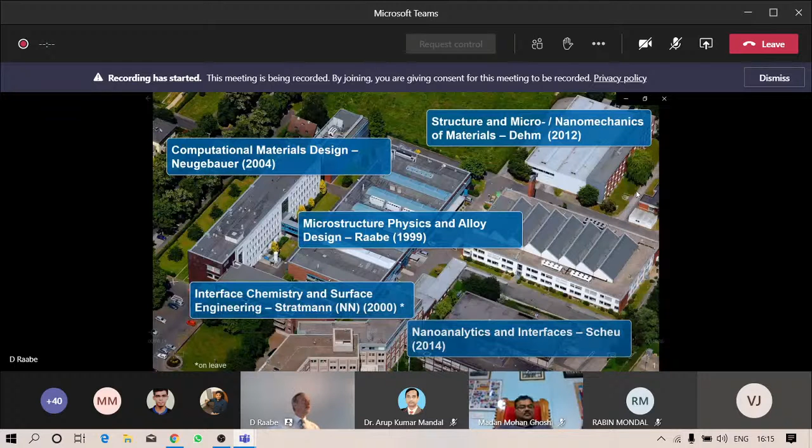The Max Planck Institut in Düsseldorf currently has four departments. There's one on computational materials design from my colleague Professor Neugebauer, mainly on density functional theory, and one on micro-nano mechanics from Professor Dehm. My own department is on microstructure physics and alloy design, which I'll show more of later. Then we have a department on surface science and chemistry from Professor Stratmann, and an independent group on nanoanalytics from Professor Scheu. So we are about 350 persons on board and have a budget of roughly 23 to 24 million per year, depending on third-party income.

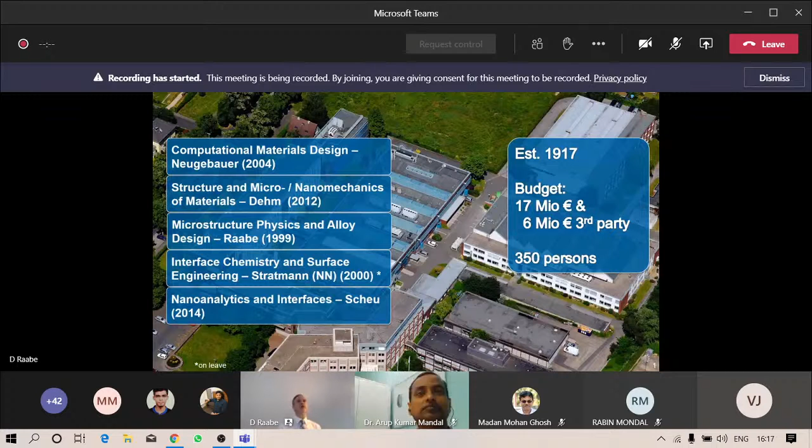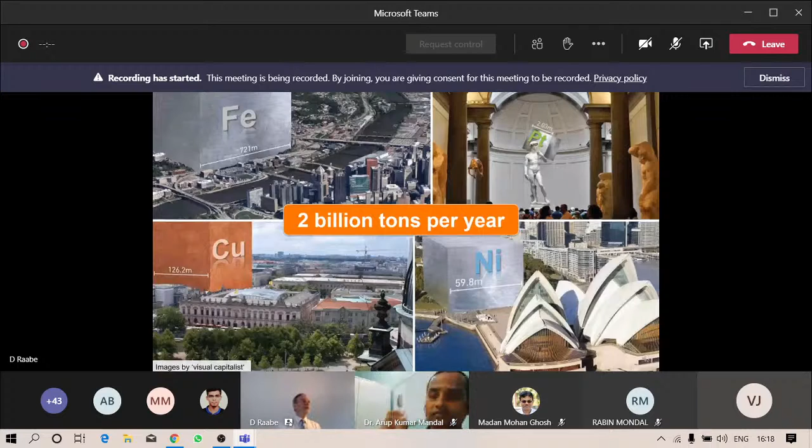So we all know why this topic is of interest at all. We know that we produce about 2 billion tons of metallurgical products every year, and this goes along with a huge global energy demand, 8% pertaining to metallurgical products. We are also causing, by that, about 30% of all industrial greenhouse gas emissions.

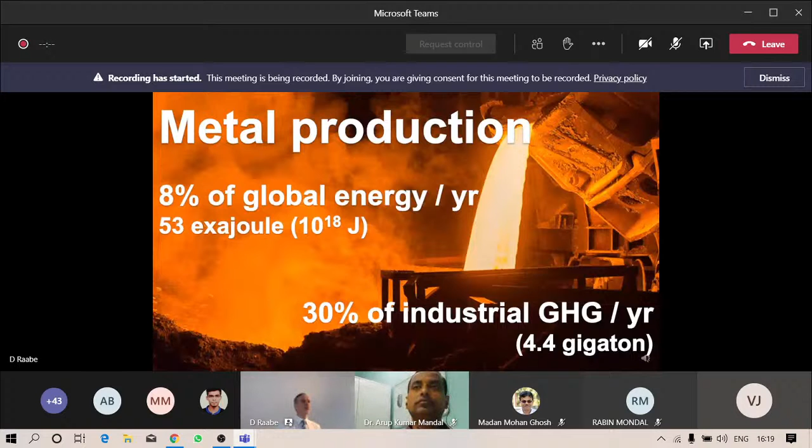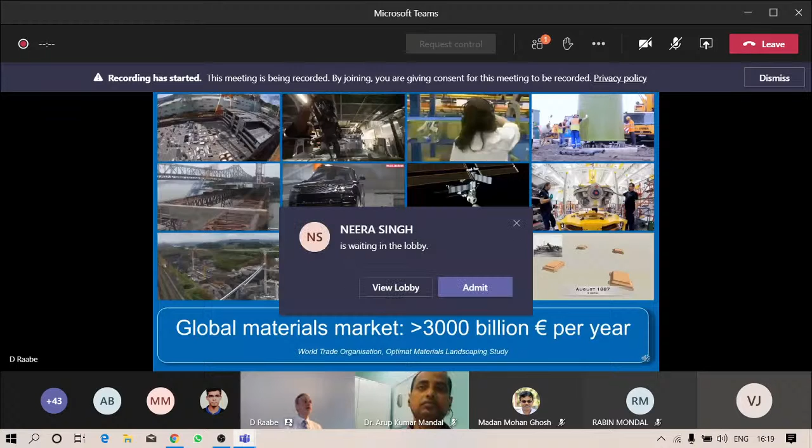On the positive side, we of course have a gigantic market related to materials, specifically to metallic materials. We talk here about a quantity of 3,000 billion euros turnover every year, where the majority relates to metallic products.

We know that the properties of our alloys are typically requested at a macroscopic scale, be it mechanical properties and corrosion. But we need to understand the defects, of course, at the atomic scales.

That interplay of defects, properties under certain boundary conditions and processing is what we are interested in today, particularly related to the question of how we can cast this into a digital twin. So the question is how we can put this understanding into mean field constitutive formulations that we can subject to a boundary condition and initial value treatment so as to make it accessible to advanced simulation methods.

Today I will show you particularly how we use such crystal mechanical and constitutive simulations in the field of advanced processing simulation, of advanced forming, and microtexture evolution predictions.

It's a triviality that mass and energy are conserved quantities, but microstructure and properties are not conserved, and they are also not in equilibrium. They are maybe in local mechanical equilibrium, of course, but there's no steady state equilibrium throughout the material. All these features have to be properly considered in any mean field constitutive formulation that we use under the framework of the DAMASK package.

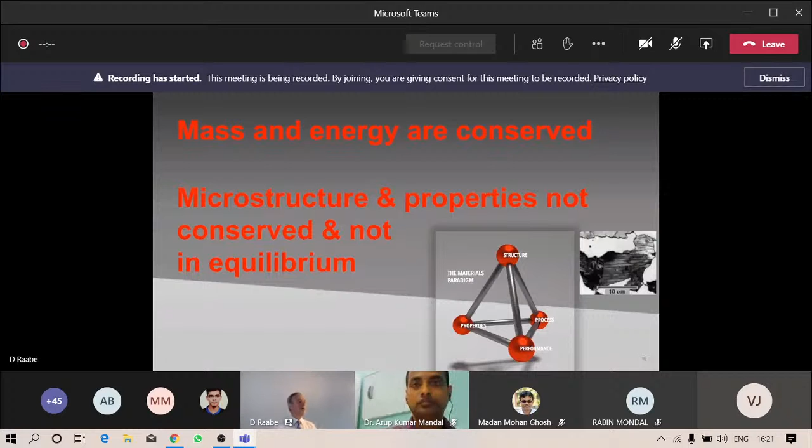That means the simulations must be microstructure sensitive. We all know that the properties of the materials, particularly the mechanical properties, are designed through the microstructure, and the microstructure is amended through the processing of the material. Hence, again, the main message that I want to share with you today is how we realize it to make such formulations mechanism and microstructure sensitive.

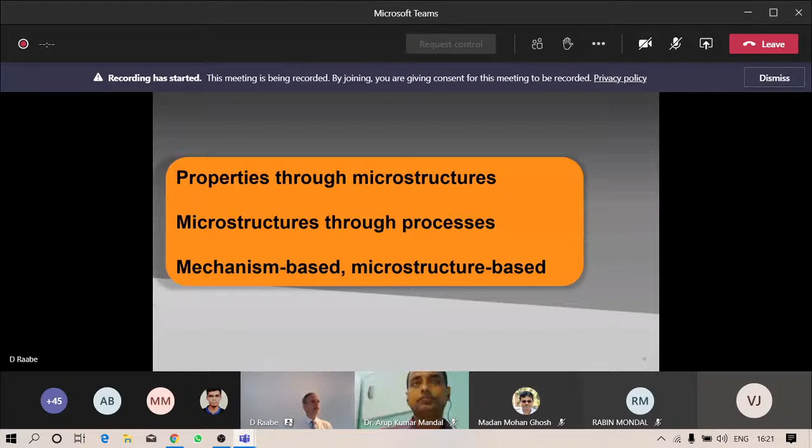That is a take-home message from any such simulation, that we have to alter and adjust and understand and simulate microstructures to serve that specific need, exploiting the variability of properties in terms of the underlying microstructure.

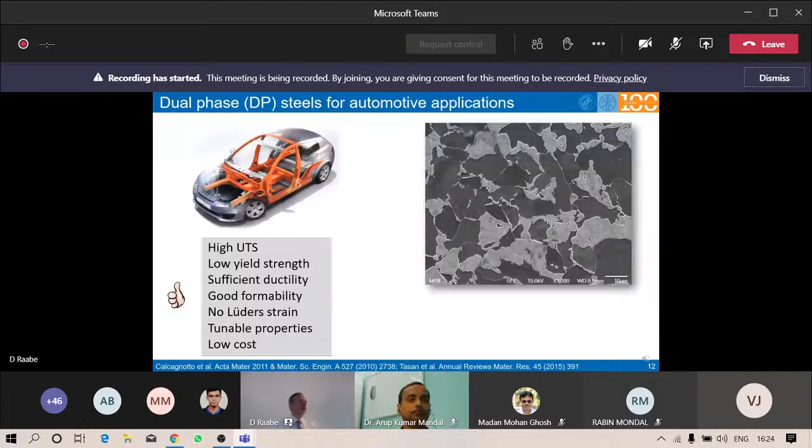They have a high ultimate tensile strength, UTS, low yield strength, which is good for forming operations, but they have sufficient ductility, good formability, no Lüders strain, that is very important for engineering parts, and they have highly tunable properties and, of course, very, very low costs.

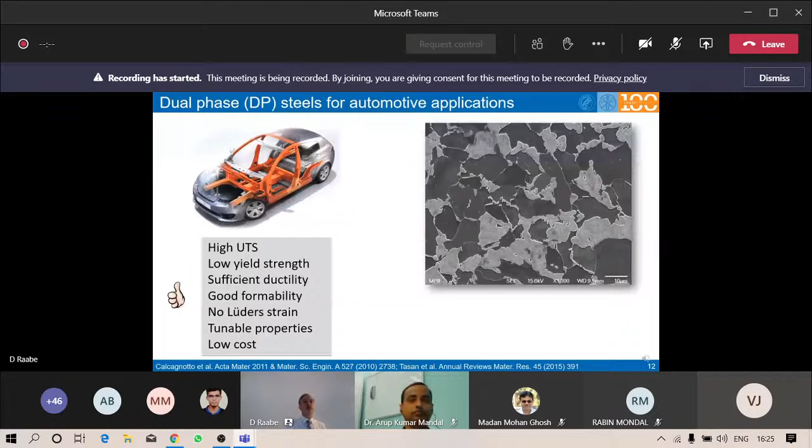Now, the tuning comes, for instance, through measures like grain size reduction or martensite volume fraction increase or carbon content increase. And we all know that would come also at the cost of ductility.

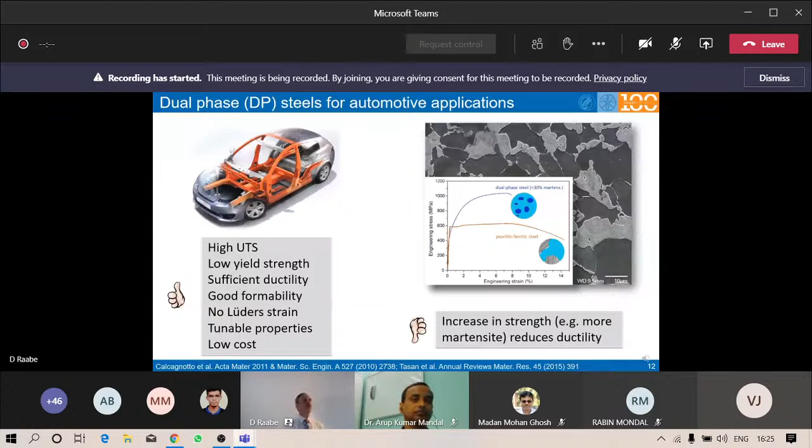Now we subject such microstructure ingredients as martensite to in situ tensile tests. That was a nice activity built up by Cem Tasan at our institute over the past years. You can study, for instance, the elastoplastic mismatch between adjacent fine and coarse laths.

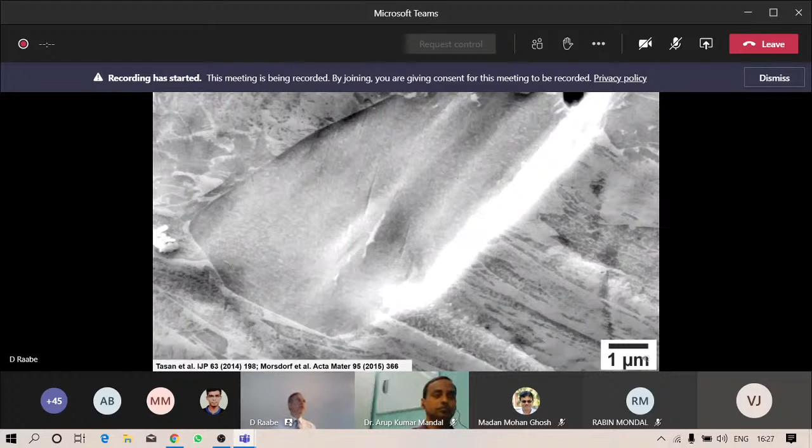We would typically assume that for a crash-relevant forming part, the TWIP steel should behave quite well, because you have a huge integral over stress and strain, meaning a part made from such a steel should have very high energy absorption capability.

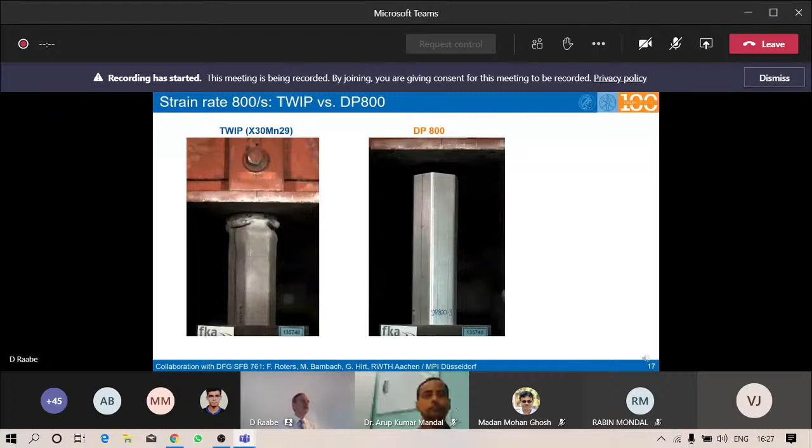Now here is a typical crash experiment conducted on both materials with such a typical crash box. Interestingly, we learn that the DP steel, with the lower integral, so lower total mechanical work, actually performs much better than the TWIP steel with a much higher integral. That's a surprising result at first glance.

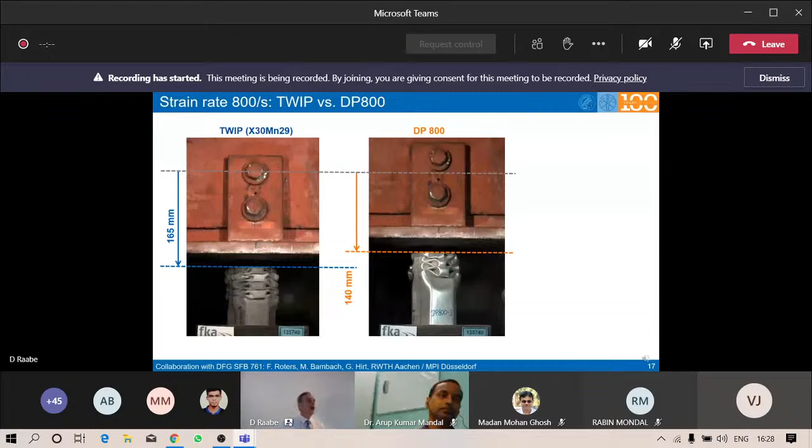But when you look a little closer at some of the strain points, particularly from the highly strained parts and buckling area of these crash boxes, and translate them back into these simple stress-strain curves, you see that the maximum strain doesn't exceed about 18 to 20%. That means only this part of the total integral is really needed for designing such a part.

So the very high energy absorption capability of the TWIP steel, as a counter-example, is actually not really needed for this specific design of such an automotive crash box as shown here.

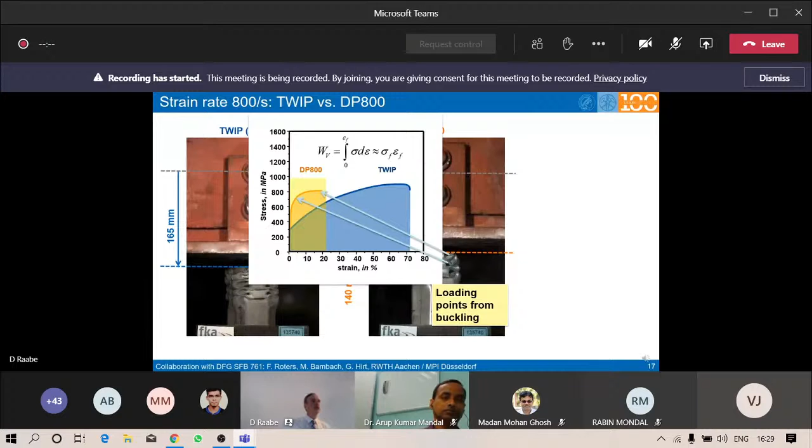That's quite trivial for a mechanical engineer, but the message is that energy absorption depends not only on the specific alloy you use, but also on the nature of the part and the loading scenario. That means any digital twin or simulation method bringing together microstructure and mechanics must be tensorial in its response and account for the tensorial nature of the loading scenario, hence must include the texture and orientation-dependent parts of the microstructure.

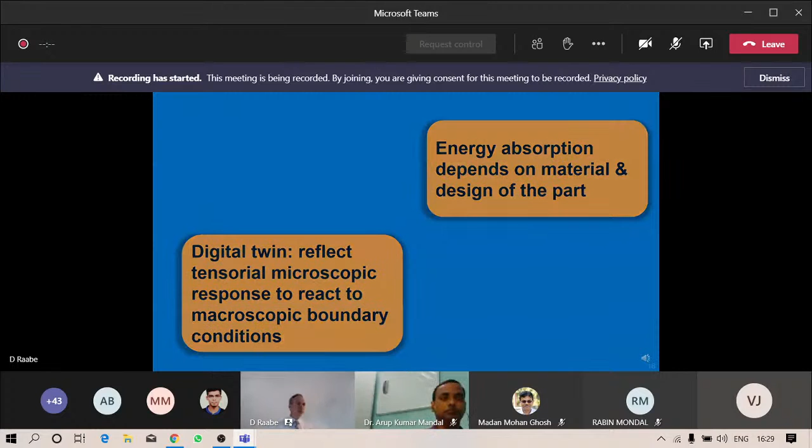That is at the very core of this simulation package DAMASK, which you see highlighted here as a little teaser. We developed that, as I said, over nearly 25 years, and have many customers and colleagues around the world in industry and academia who use it. We are just before a new release.

Very soon a release of DAMASK 3 will go public. It includes a couple of features and capabilities that you can do with this simulation package, which I'll share with you during the course of this presentation.

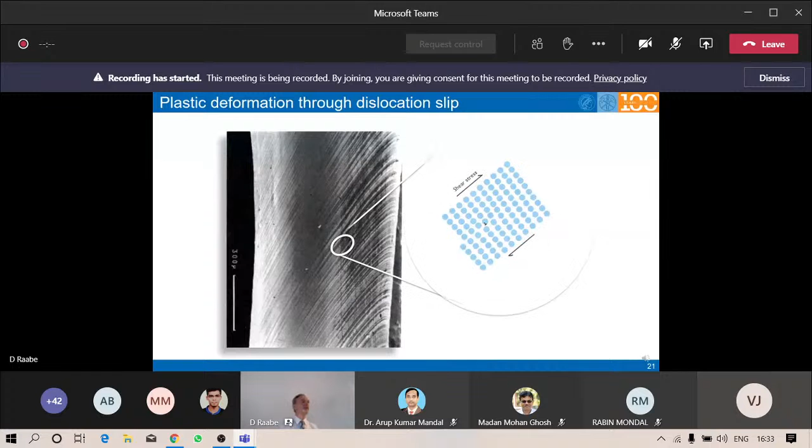Let me jump back to a very trivial picture that we all know from textbooks, just as a reminder of the underlying mechanisms that we try to describe in crystal plasticity models. Here you see such a nice picture from a textbook with surface steps coming from the glide of dislocations. Of course, the surface steps are much bigger than one Burgers vector because we have a number of dislocations coming from the same source.

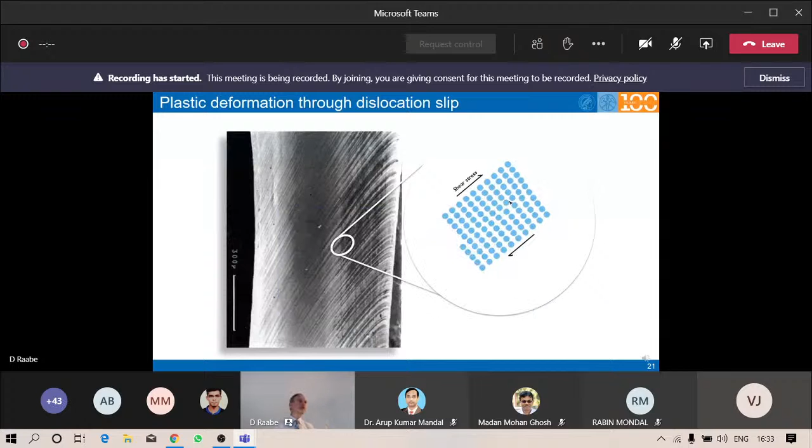And then you can use, as plotted here, the well-known Orowan equation, which allows you to calculate the shear rate gamma dot from the activity of these mobile dislocations, their Burgers vector, and their velocity field. So you have a very simple mean field access from Orowan theory, from Kocks-Mecking type of theories, to translate populations of many dislocations into the corresponding kinematic measures that you need.

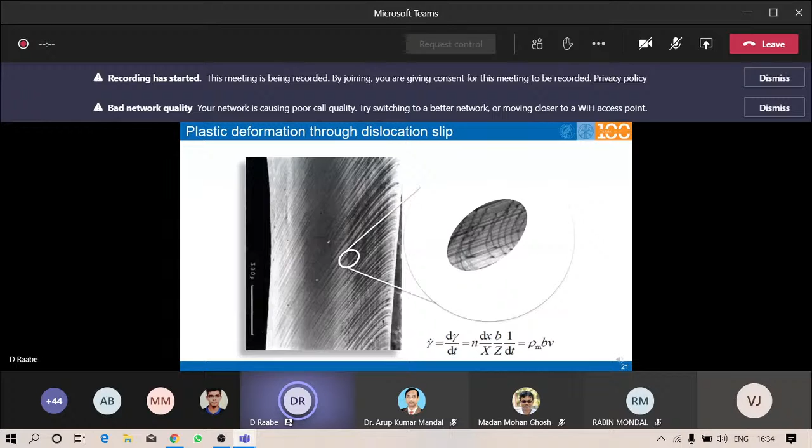When you want to describe the strain hardening, you have, like in a Kocks-Mecking model, to account for the dislocation interaction, or you can consider the mean free path reduction, like shown in this little animation. When a grain boundary is in your way, you can describe the reduction of the mean free dislocation path in a harmonic way, where you add up all the obstacles that are in the path of a moving dislocation set.

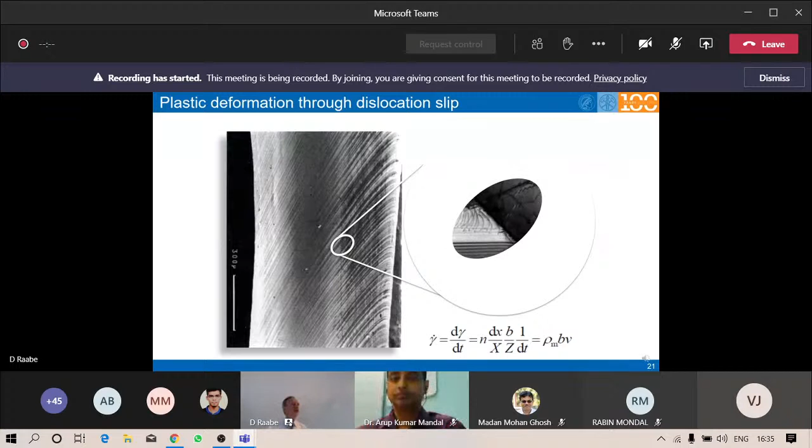And that would contribute to the strain hardening in a Taylor formulation. What is really important for more complex steels are TRIP and TWIP effects. TRIP stands for transformation-induced plasticity, while TWIP describes twinning-induced plasticity. You see here an in situ microscopy movie where you see how at the tip of the martensite you create rich populations of dislocations that are emitted because that martensite, formed under mechanical loads, is not commensurate, it's not compatible, and has a different volume than the adjacent austenite. That creates a lot of misfit plasticity that hardens the material.

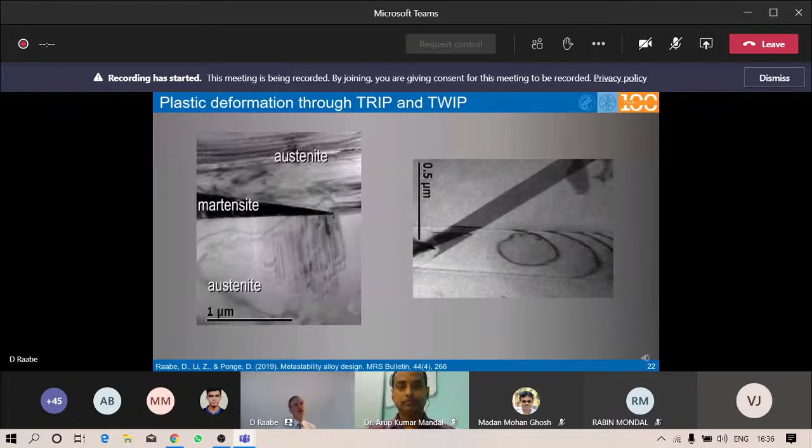Likewise, on the right-hand side, you can see a typical in situ TEM image from a movie of a TWIP steel, where the formation of twins produces a confinement of the plastic slip of the dislocations. And the hyperbolic function tells you that the stress for that half Frank-Read source operating here scales with the spacing of these twin walls.

So these were just some examples where we try to translate elementary physical metallurgy mechanisms into corresponding mean field formulations, mainly through the reduction of the mean free path or the stress needed to activate Frank-Read sources.

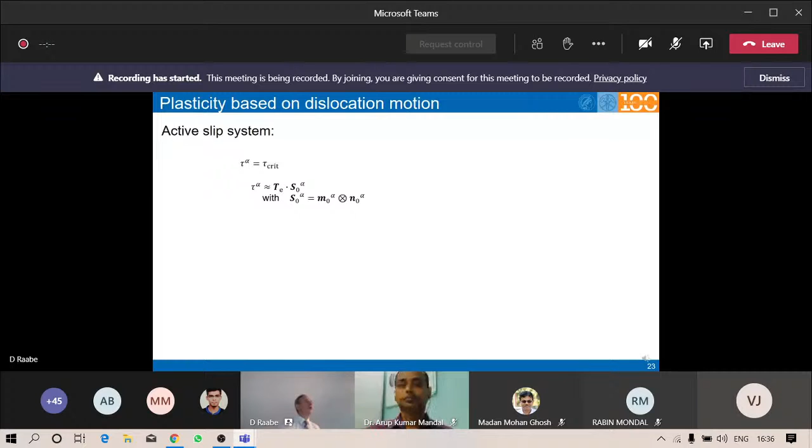Now a bit of the kinematics, because all of this has to be written in dyadic form, in tensorial form, not in scalar form. Here you see again a very simple textbook equation from my classes on micromechanics when we pick a body-centered cubic crystal structure and assume that you have 48 slip systems. You can, for each of those, calculate what you know typically as a Schmid factor, which is, of course, a Schmid matrix or Schmid tensor.

When you add to this the 1 1 2 or 1 2 3 systems, where 1 1 1 is of course the Burgers vector divided by 2 and the first indices are the glide planes, then you get a more complex shape of your local dyadic response. And all of these glide systems come with an individual strain hardening behavior described by these constitutive laws I described before.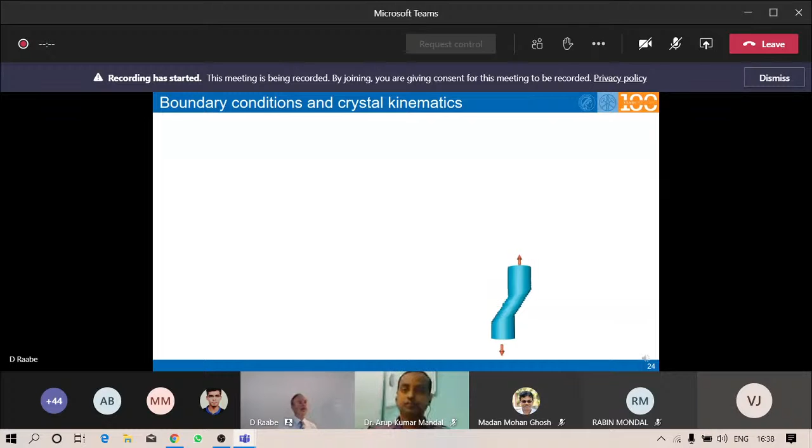But we learned from this very simple picture a couple of things. You see that the crystal is typically deformed under certain constraints. This sounds trivial, but it cannot move freely as shown in this animation - it is tied to these holding grips in the tensile machine, or constrained by the environmental crystals. That means you have only these geometrical constraints, these boundary conditions that enforce certain crystal rotations.

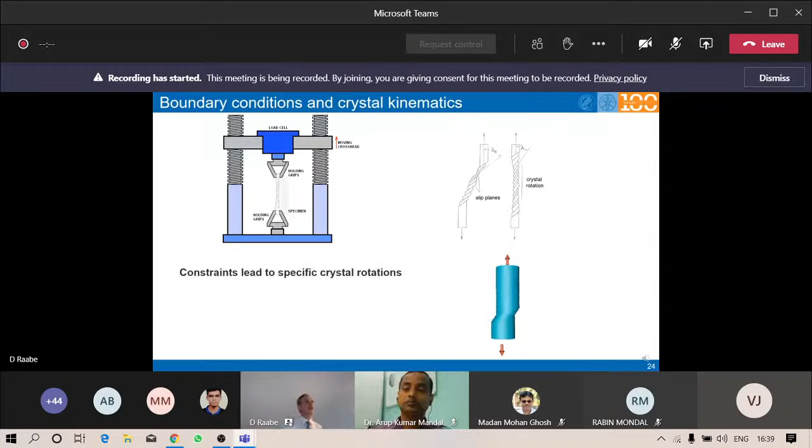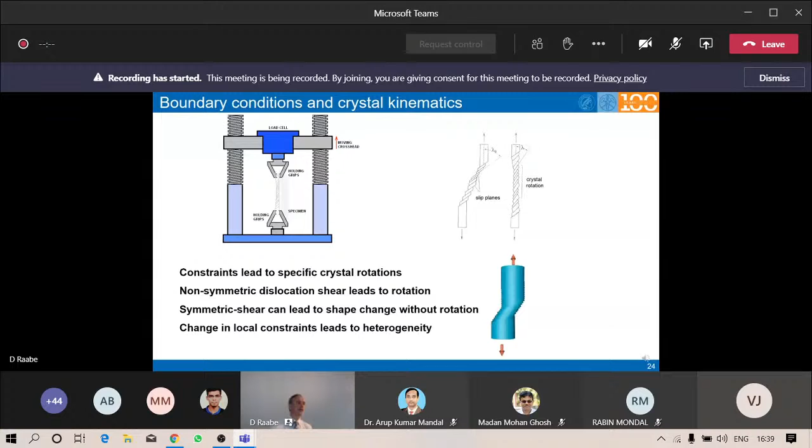And the fact that these boundary conditions are not homogeneously distributed across the expansion of such a crystal means you can also have gradients of crystal rotations from one surface to the other, which easily explains why often the texture in micromechanical evolution is very heterogeneous even inside grains. I found this view graph helpful because even such a simple kinematic point can be made readily clear with such an example.

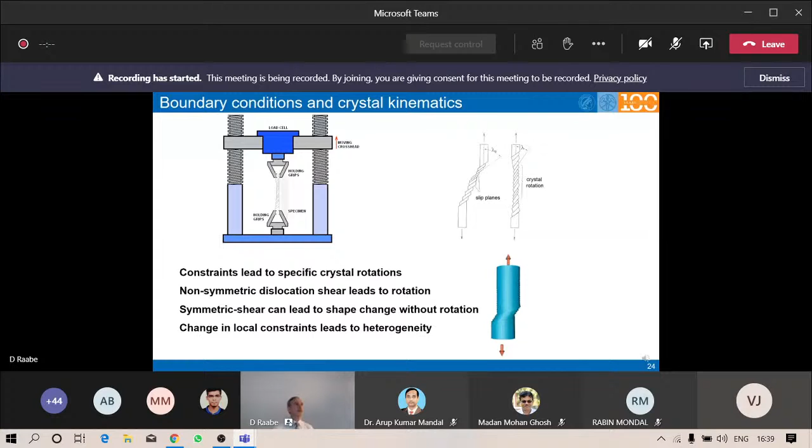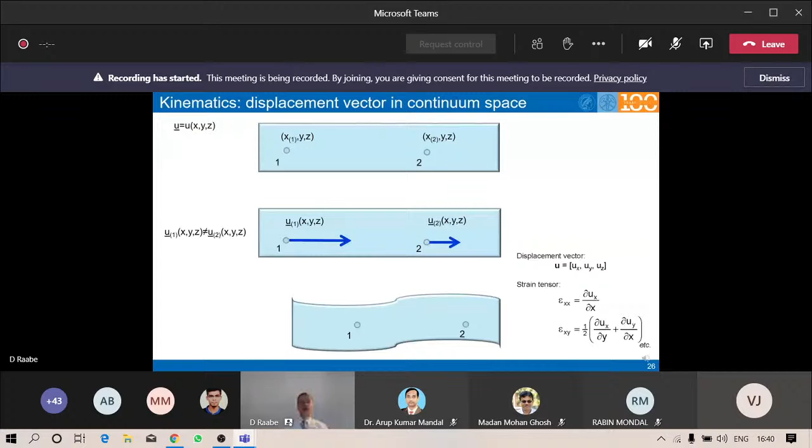When you repeat that thought experiment but impose two displacement vectors, shown in blue, which are not identical, either in magnitude or direction, then you impose a distortion - that means these are not compatible. That sounds trivial, but that's how you formulate the displacement gradient. That means only the lateral gradient of the displacement field is what gives rise to being accommodated by dislocations or twin or TRIP effects. So strain is just one possible linear, additive, or polar measure for the distortion that we typically use.

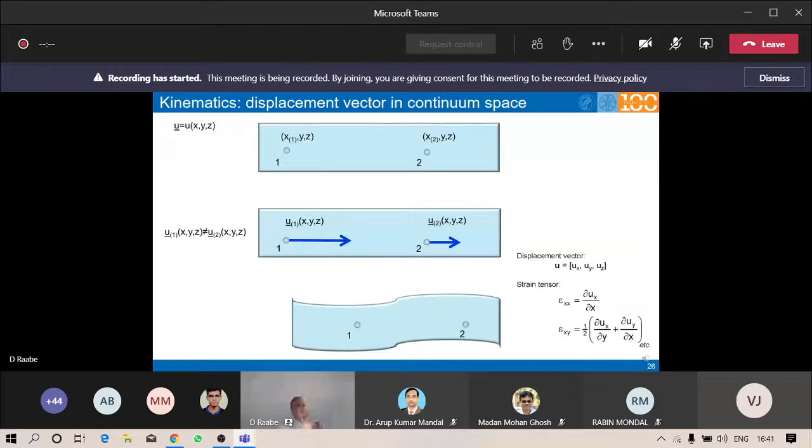The physics quantity that you need to match is the so-called displacement gradient tensor, and that is what you describe in terms of the individual dislocation fluxes in each of these directions. Because that mismatch described here in classical continuum mechanics has crystals accommodate it by shear carriers like dislocations or twins.

In DAMASK, we represent all these anisotropy features at the integration point - the elastic response, the phase composition, the shear rates, the flow equation I already told you about, the Schmid factors in a polar kinematic framework, the crystal orientations, and also possibilities to do local homogenization at a spot.

When you describe a bigger engineering part, your point cannot describe a single crystal, but must already describe an agglomerate, a mean field set of crystal orientations or phases that you homogenize and feed that information back to your integration point. And since recently, we also work on details of damage evolution, mainly with Pratheek Shanthraj, who is now at Manchester University, and with Bob Svendsen, who is at RWTH in Aachen.

Maybe the biggest challenge that we currently encounter in such simulations is how to predict the gradual evolution of microstructure-related damage in such materials with their high degree of inhomogeneity.

So that gives you a rough impression of how the setting in DAMASK works, and which constitutive parameters have to be taken into account. That means you can retrieve the information you need to map, either from microtexture measurements or from X-ray texture measurements, and subsequently decompose it.

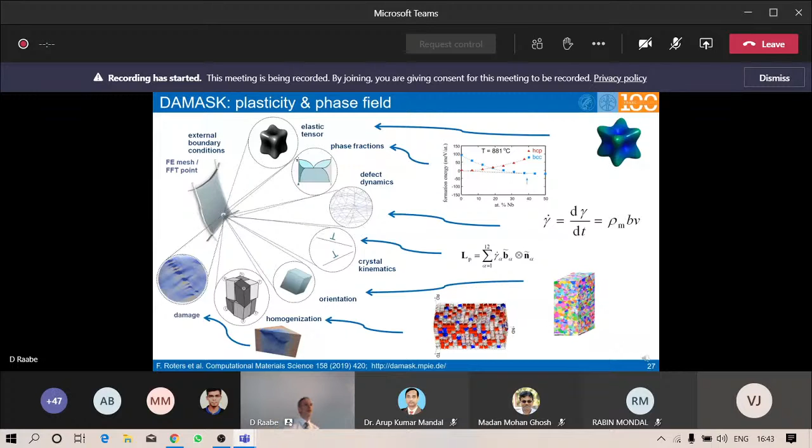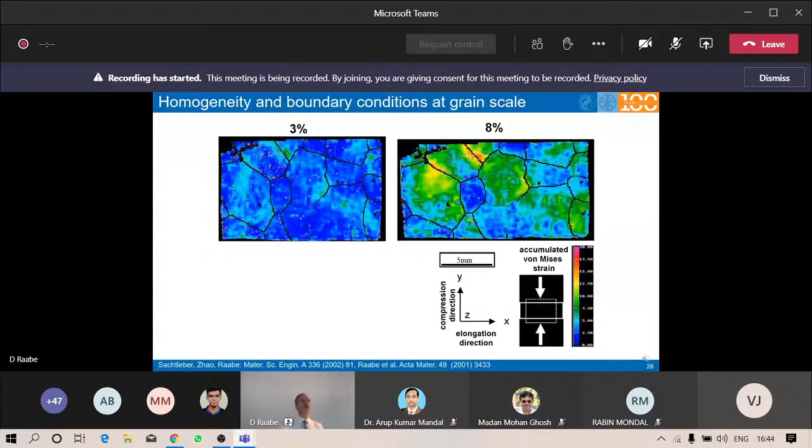Even with 15% total thickness reduction of that columnar polycrystal, some grains have undergone deformation beyond 20% locally, while this very hard rotated Gauss grain in the center deformed not more than 2 or 3%, even though the entire sample was loaded 15%. So that shows from a very trivial high purity aluminum sample how enormously inhomogeneous such deformation can be.

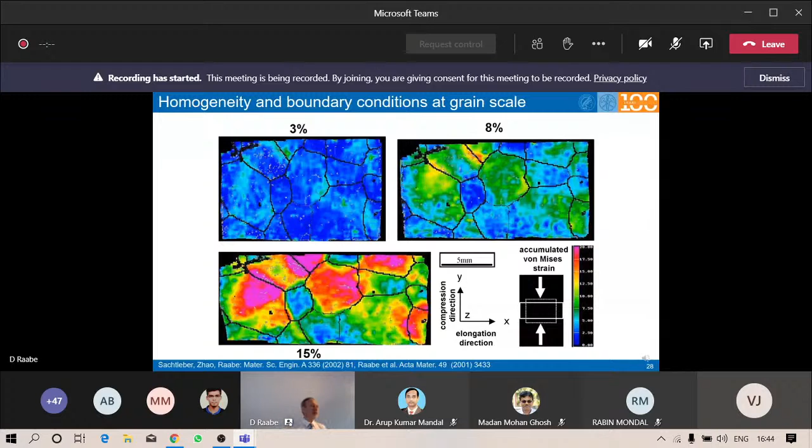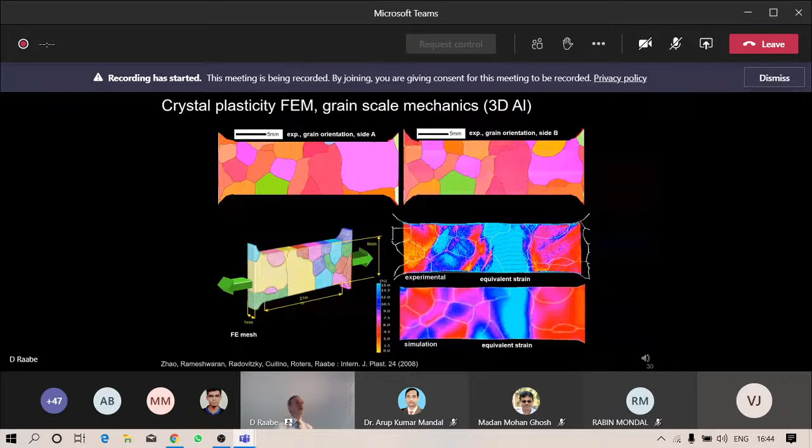That is just the 20-year-old simulation result we achieved by finite element calculations, by crystal plasticity finite elements. This is another example we did with Raul Radovitzky about 15 years ago, using a somewhat more complex setup in full 3D with a crystal plasticity calculation. We did very similar experiments again, and found very good agreement. That's how we step by step developed these techniques.

Now let me show you more in detail what we've been doing over the past 5 years on more complex steels, going back to the DP steels with ferrite and martensite. Here you see such a calculation based on the microstructure I showed before, and for a simple tensile loading situation, the enormous variation in the local stress that you predict. Here in blue, you see gigapascal range stresses at local mismatch features.

Interestingly, you even see compressive stresses, which happens when two very hard areas are moving together by the constraints, setting local regions even under compressive load. This is something you get out of a more complex microstructural landscape, such as encountered in many complex steels.

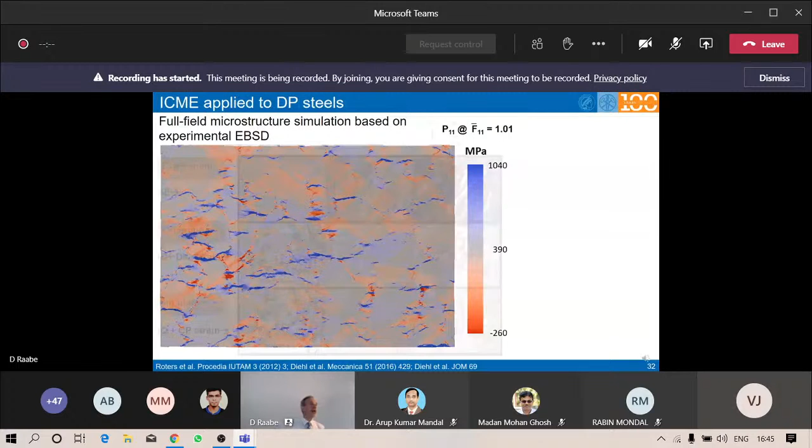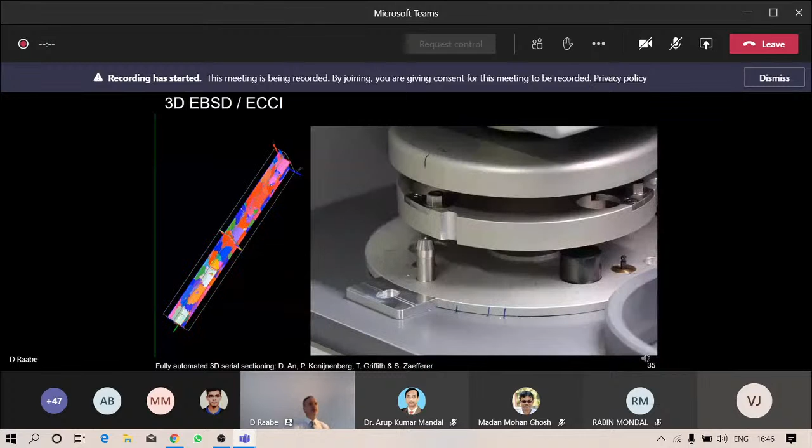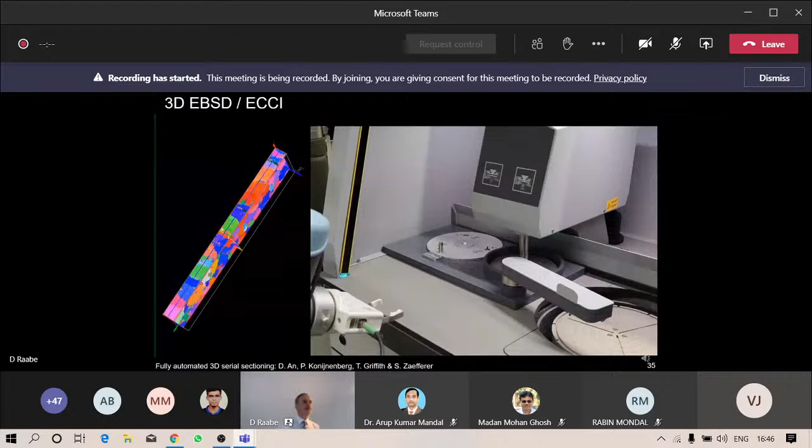So we invested a lot of time and effort over the past 10 years to develop a 3D serial sectioning technology. This was all built in-house with Zaefferer, and an automated serial sectioning technique combining a classical polishing machine that is run completely by a robot. There's no researcher involved anymore.

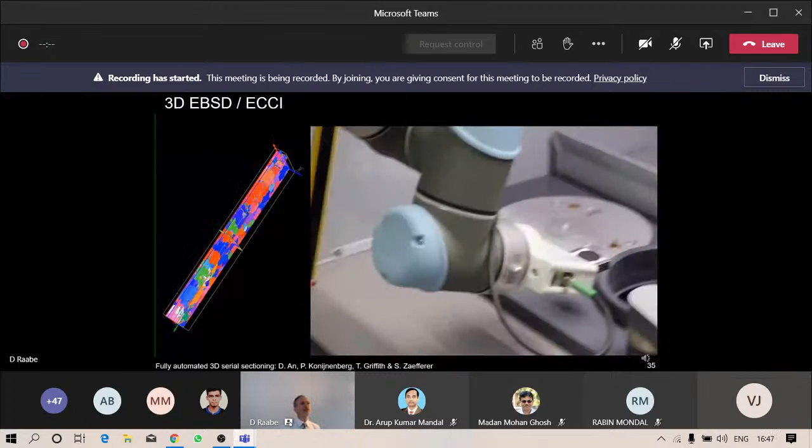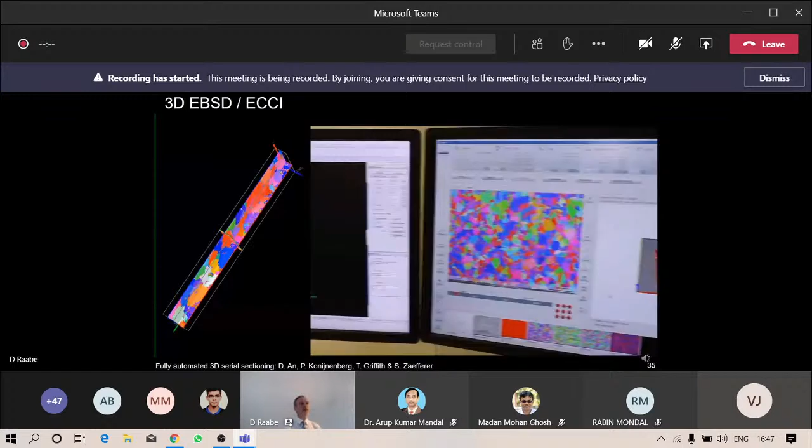The robot takes the polished sample out of the polishing machine and charges it into the microscope. We connected the robot to a Gemini-size microscope for high resolution field emission measurements of ECCI contrast, EBSD contrast, and so on. The robot alone operates this, starting the measurements to get the microstructure results you want, then stops the experiment, takes the sample out, and runs the next polishing round.

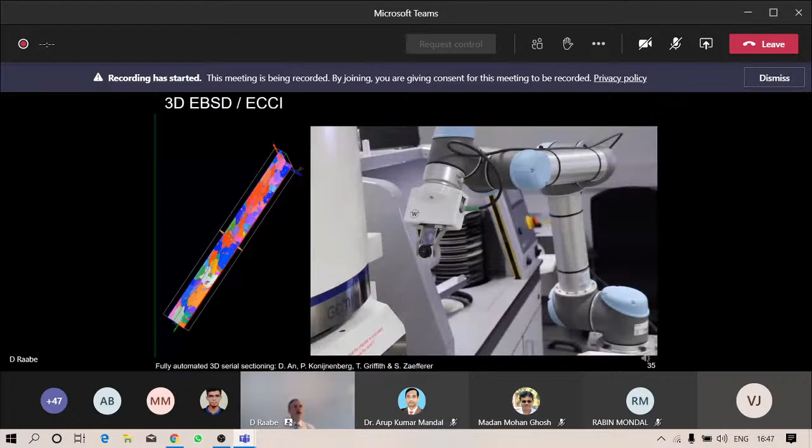You can define the thickness removed between subsequent serial sectioning polishing steps, and get all kinds of 3D microstructure information, such as a corrosion fraction as a function of corrosion time for different grain boundaries, like here from a stainless steel.

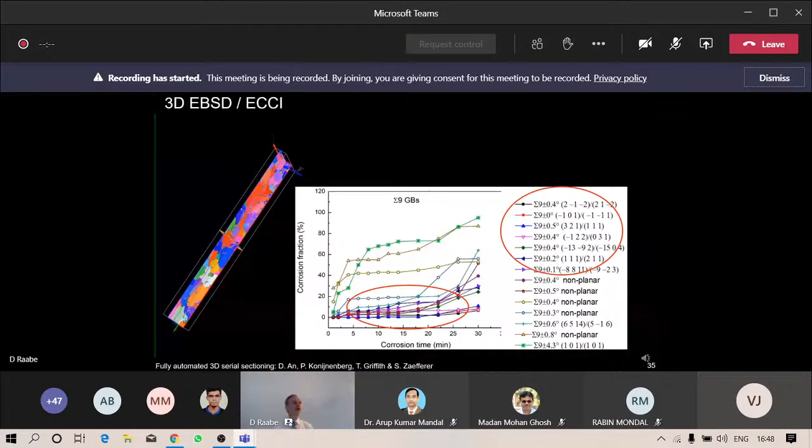Or you get results like shown here from a copper sample subjected to an ECAP process, from a project by Peter Konijnenberg, Shao-Pu Tsai and Stefan Zaefferer, where you get not only the three-dimensional microstructure but all the associated higher order kinematic information, such as the nature of the crystallography of the grain boundaries, showing here the population of the 60° <111> grain boundaries.

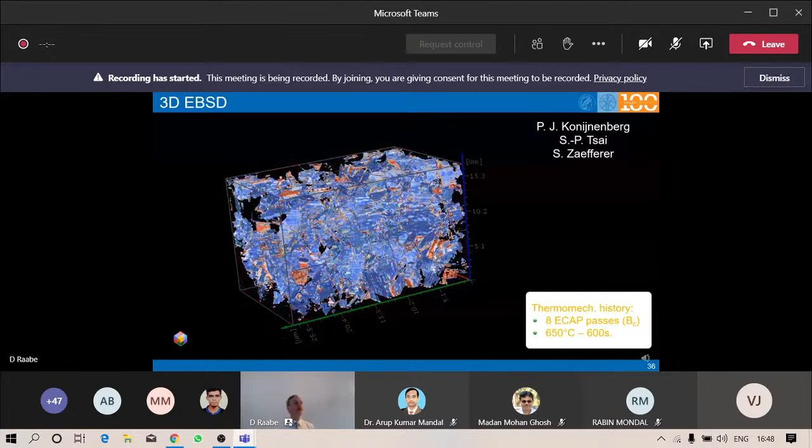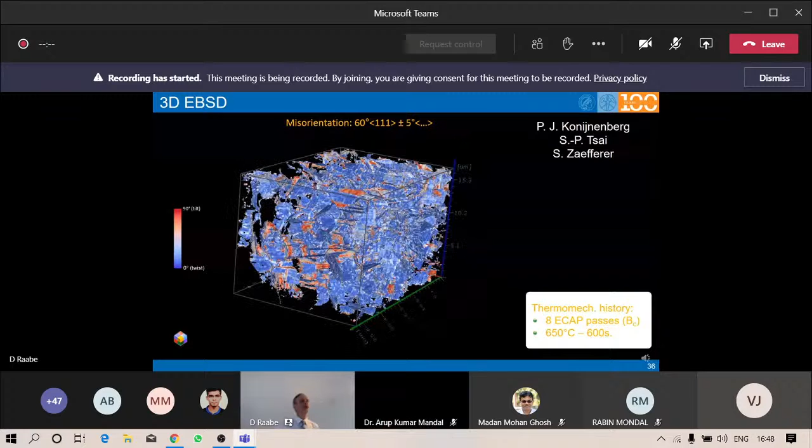You can differentiate between the tilt and twist boundaries, and you get data packages such as shown here, where you see both the grains and also the individual pattern qualities for discrimination among phases and the associated interfaces.

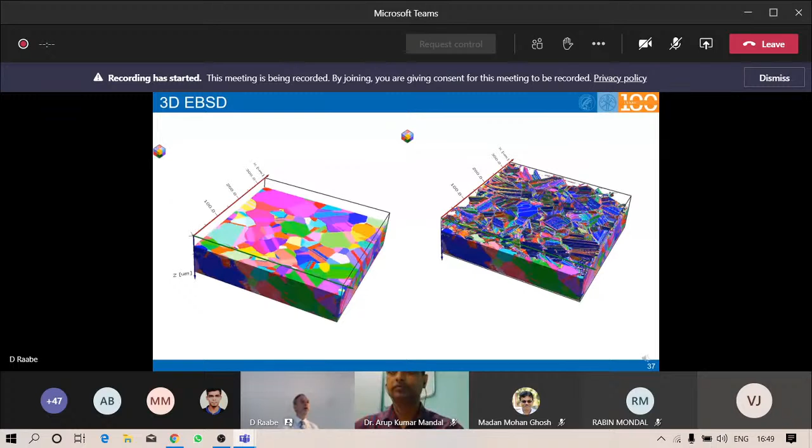Now we do the same thing also for steels. I've shown that movie already, where you get such 3D data, for instance now again for a dual phase steel. We ran such a box of 3D data through DAMASK, and you get a real high fidelity simulation of the strain and stress distribution also from such 3D microstructures.

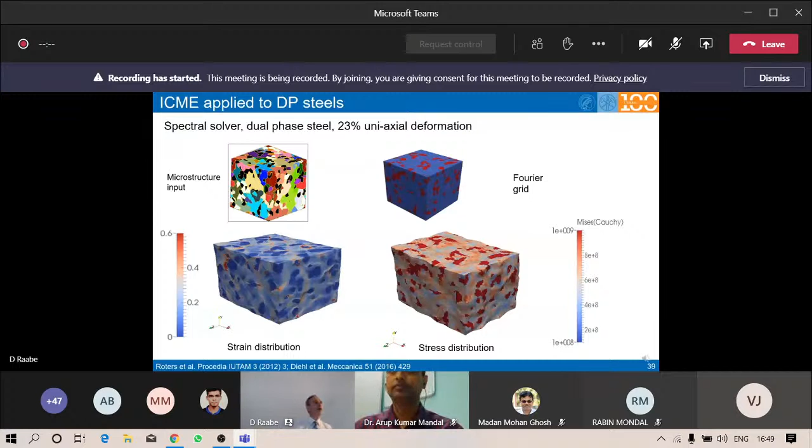Now we took a much bigger patch that was done in a big project by my colleague Martin Diehl, who is also now a professor at University Leuven, just started a couple of months ago in Belgium. You see we did the same thing. We render this microstructure digitally, but you must appreciate this is now a three-dimensional microstructure, consisting of many such slices, as I've shown you before, retrieved by this technique.

And you see here now the corresponding computer simulation where this is uniaxially loaded, and the equivalent strain and equivalent stress distribution that arises. When you compare that in detail step by step, like I've shown before, you get a much higher fidelity of the reproduction of your measurable surface strains due to the fact that you really account for the microstructure layers below the surface, which affect the surface stresses and strains. This is not only important for getting a more plausible or trustworthy simulation result, but it's very important for us to really test our methods and develop proper models for damage.

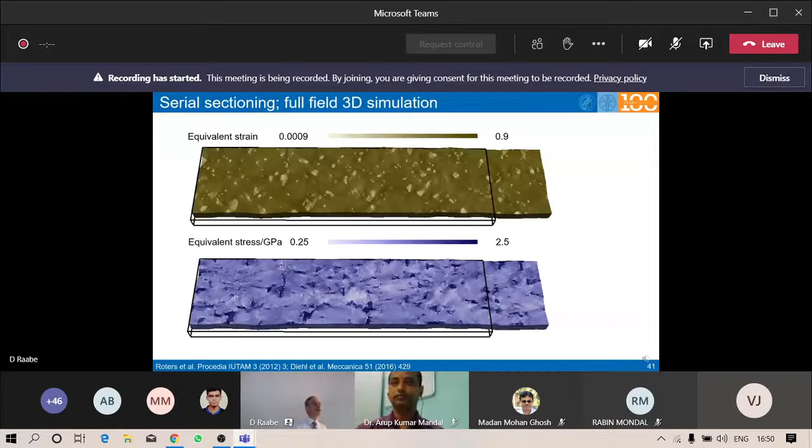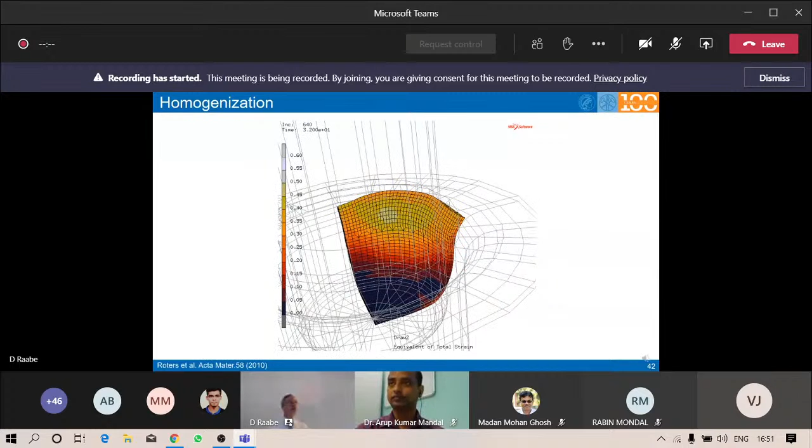As I told you, we also use this jumping out to the other side of the scale end. We use this also for homogenized crystal mechanical simulation of larger forming parts, such as done in projects in-house in collaboration with industry for automotive sheet forming, or for the development of advanced yield surface functions. We have recently written a couple of papers showing how you can, on the fly, calculate yield surface parameters from crystal plasticity models.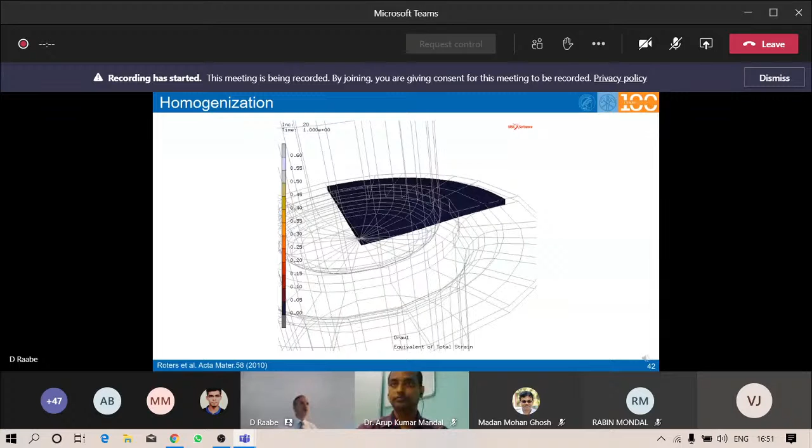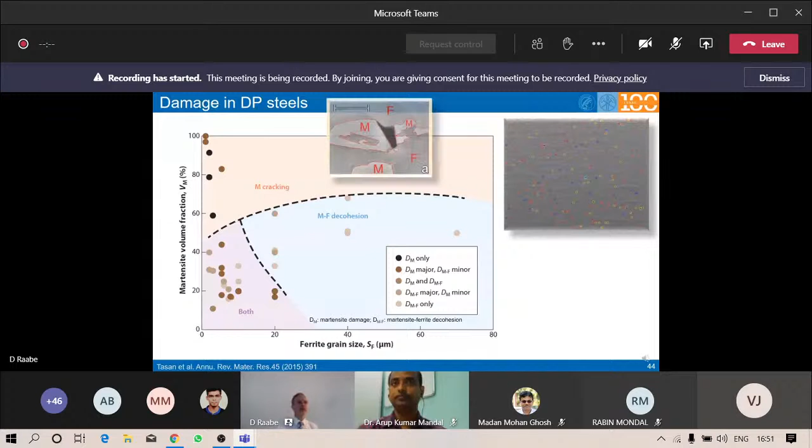Now let me turn to a couple of pending points on which we currently work. I don't go into so much detail, but show you only briefly where we have currently construction sites. One is, of course, damage evolution in materials which have high mechanical contrast in the microstructure, like DP steels, or other materials too. You have a couple of feature patterns shown here, such as martensite fracture, such as delamination between martensite and ferrite, and so on. As you all know, this is maybe the biggest point in high-strength materials development: that you can predict the microstructural evolution of such damage features, both during manufacturing, during processing, and during use.

There are two results that we did together with my colleague Pratheek Shanthraj, who is, as I told you, lecturer at Manchester in the UK. You see here a couple of results of heterogeneous microstructures, where in blue you see the evolving topology of the cracking in this material. I don't go into much theory detail here, there isn't enough time, but just for the experts among you...

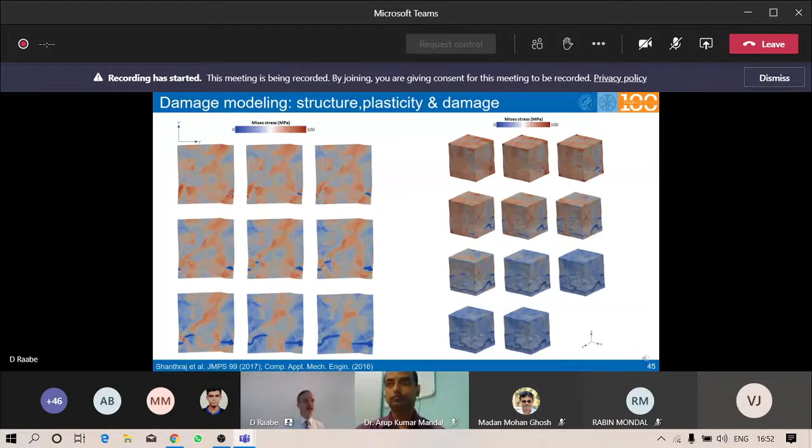We do this in principle based on an extended Allen-Cahn type of theory, where the idea is that you devise a Landau type potential functional form in which you, like in a classical Griffith form of classical fracture mechanics, introduce the balance of the elastic energy density, the plastic energy density, and the surface energy that you have to balance in a functional form to predict where a crack may evolve.

We couple this also completely with thermodynamics and with Calphad coupling, so that in the software you can also run phase field simulations, but with full appreciation of elasticity and plasticity, such as shown here for the time scale, which goes from left to right, where you see the plastic strain that evolves around the interfaces of this classical Ostwald type phenomenon. So this is just, again, without going into much deeper detail, showing you that we also go on working on combining crystal plasticity with anisotropic elasticity and with phase field and phase transformation problems and with fracture problems, because these things are often in modern materials closely entangled.

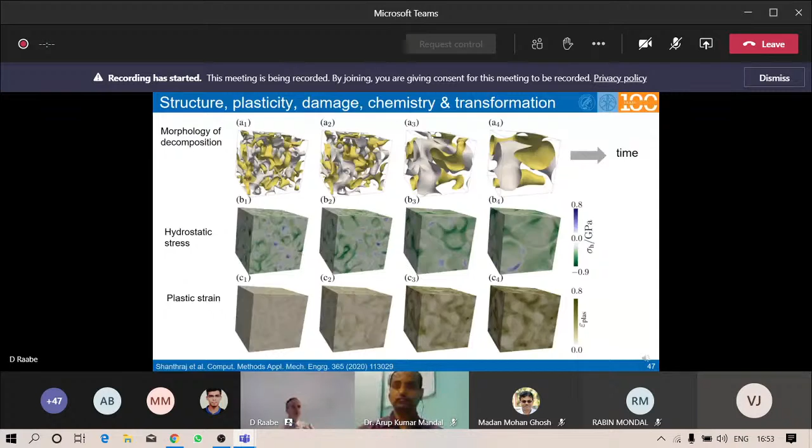Now, at the end, I would like to share a few thoughts with you about ongoing work, all unpublished, on microstructure prediction at very fine scales. Here we have now different mesh refinement techniques that we currently test and play with, and I just want to show you some preliminary results.

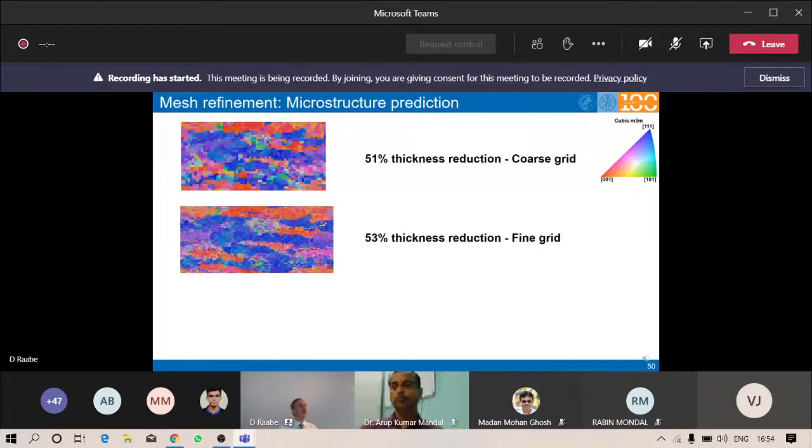So we currently try to push the limits on the microstructure prediction side, which is important, for instance, for recrystallization.

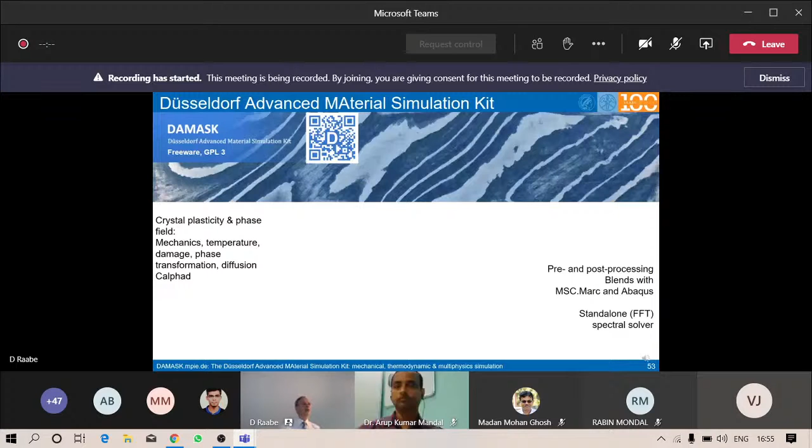And so with that, I gallop quickly now towards the end of the presentation. This is just a little teaser about our DAMASK simulation package, which allows you to do many of these things. Some are still pending, not implemented, but some will soon come in the next version of DAMASK. And we cover not only the engineering scales like yield surface for forming operations, different types of yield surface packages, but of course also damage evolution.

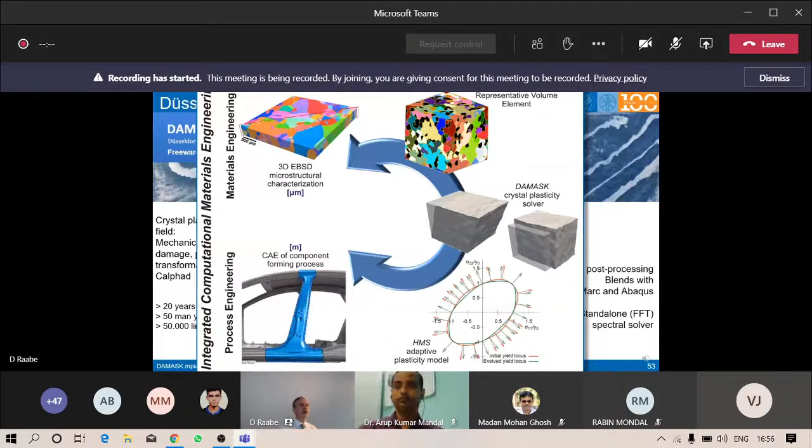And here the engineering part ranges from the 3D EBSD microstructure side up towards on-the-fly calculation of yield surfaces that you might need for predicting forming and shape operations, for example for the automotive industry. And our mission is really that we make sure these quantitative formulations are not empirical, but are really based on microstructure physics understanding.